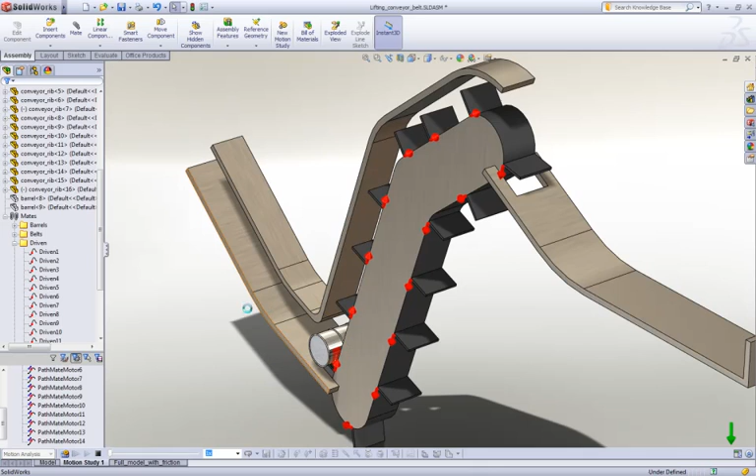Let's take a look at how this works. In this case, all we're doing is driving these ribs at a fixed speed representing the conveyor speed. But it would work with event-based simulation as well, so you can do event-based motion. All we have set up here is some contact between this barrel and the belts, as well as the outer frame. So it just takes a second to rebuild, and away we go.

The reason it works so quickly is because it's all kinematic aside from the contact. So there's not that much overhead to actually using pathmate motors. It will help you do things a lot more efficiently.

You can see in here we've actually got a little bit of friction, so you can see the barrels spin around as it rolls along the conveyor system.

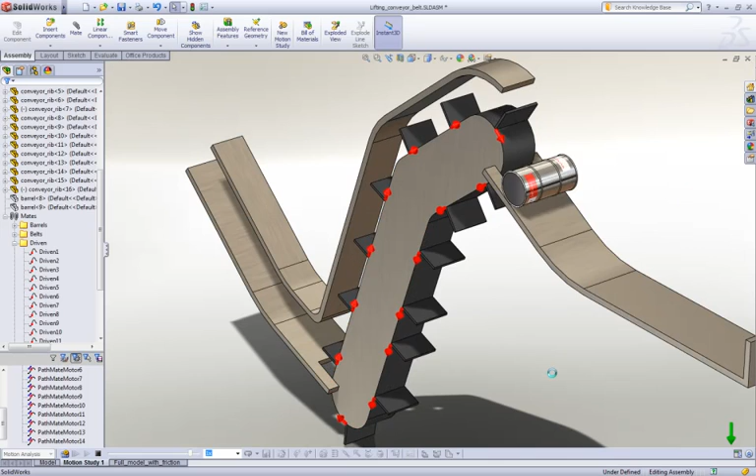And there we go. So we can just play that real time. You can see, very nice looking.

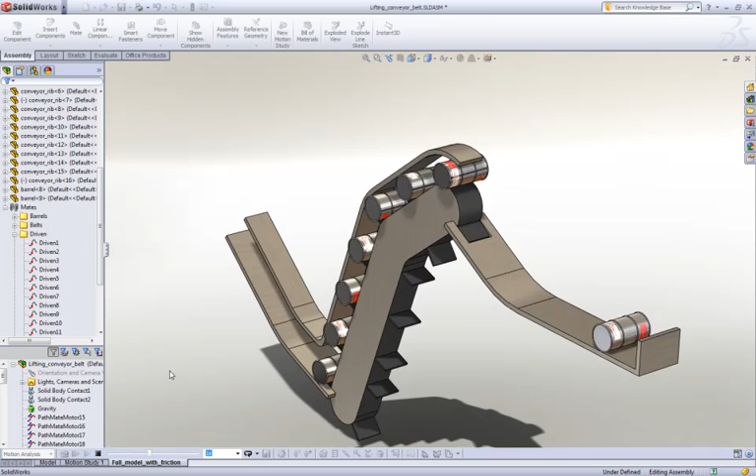And we can take that a step further by providing a whole series of barrels and see what that overall resulting motion looks like. So again, it's going to be great for machine designers or people who want to study the operation of conveyors, cranes, roller coasters, whatever. It's a great new enhancement to the motors in 2011.

Another area of improvement in 2011 is with how we define movement of our systems, whether it's through motions or forces. That's a new and improved motion function builder. In this case, we've got a packaging system. We're going to do a pick and place operation to put these shrink wrap towels into the cardboard boxes. What we're going to do is just focus on the timing of the move over. We want to shift the package over once it's raised from 0.5 to 1.5 seconds.

We've already got a function set up, but let's look at how we go about creating one of those. We have our built-in system of functions, such as constant speed, distance, oscillating, and so on. But we now have the ability to create our own custom functions, as you can see here. You can either save those or load them from file, and we can create new ones. So you can see we have our regular types, such as bringing in data point functions.

The function expression has been greatly improved, where we now have immediate access to all of the available functions in the list over here. So if you want to use any of them, just select the function and then fill in the blanks, and it will actually graph those for you as well. We also see access to the variables and constants.

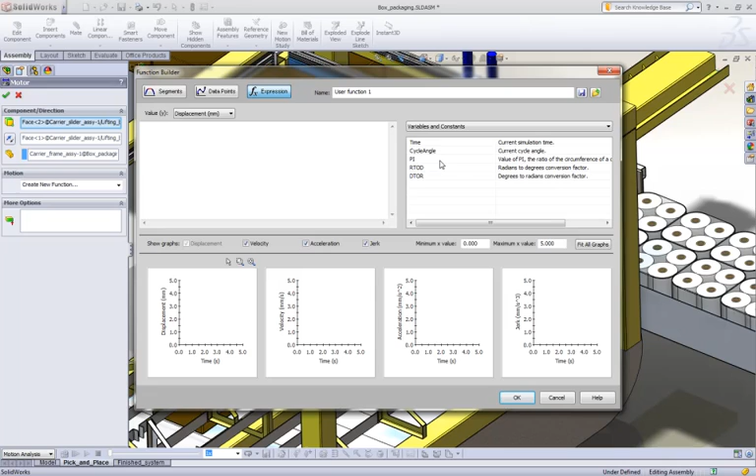Something new in 2011 is support for cycle angles. So if you're in the machine design business and you've got a cycle time for your machine, you can actually set it up and work out everything based on a cycle time, and just adjust the cycle time for everything to scale the timing and movement of the parts. Very powerful tool for machine builders.

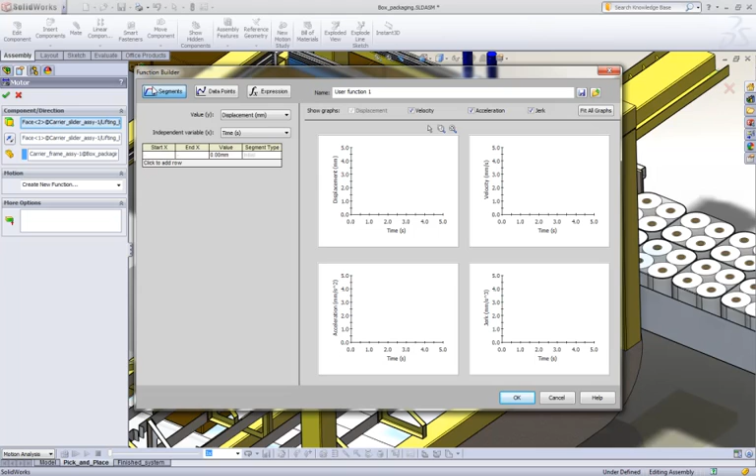But the most important one we want to talk about is segments. Really the changes that have come have been driven by customers, and with that the way they want to define functions, which is to build up ramps, dwells, and so on. So let's take a look at how we do our transition across.

We want to push it over from 0.5 to 1.5, hold it over at the other side from 1.5 to 2.5 seconds, and then bring it back from 2.5 to 3.5 seconds. So the first step to do that is from 0 to 0.5 seconds, keep it at 0. And again, we've got different interpolation options here, customer driven based on how many functions they typically use.

But from 0.5 to 1.5 seconds, we want to move it across. So we're going to move the motor 1090 millimeters. And again, we'll just set our interpolation. This is where you can see the value of seeing the velocity, acceleration, and jerk profiles.

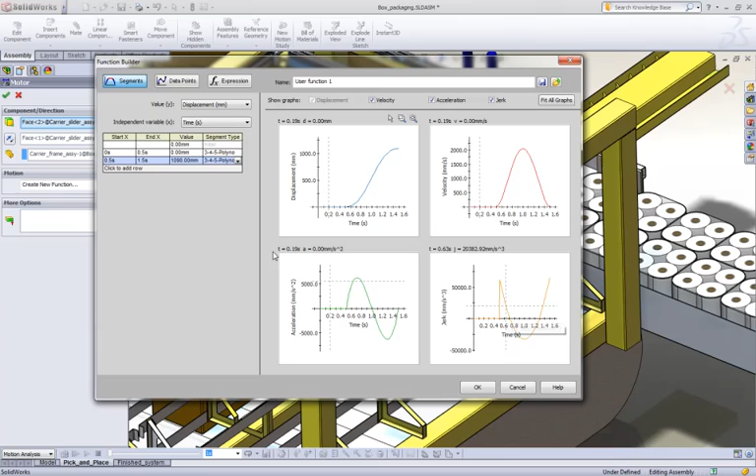And from 1.5 to 2.5, we're going to hold it there. So this is the dwell. And then finally, from 2.5 to 3.5, we're going to return back to 0. And then from 3.5 to 4 seconds, which is the end time, we're just going to hold it down there.

Again, we can set, as we said before, we see the velocity, acceleration, and jerk profiles for using that. We can type in the name here, and we can either save or load it from a file. You can control if you just want to see the displacement function. And you can see zoom to fit, you can zoom to the area of the graph, and so on.

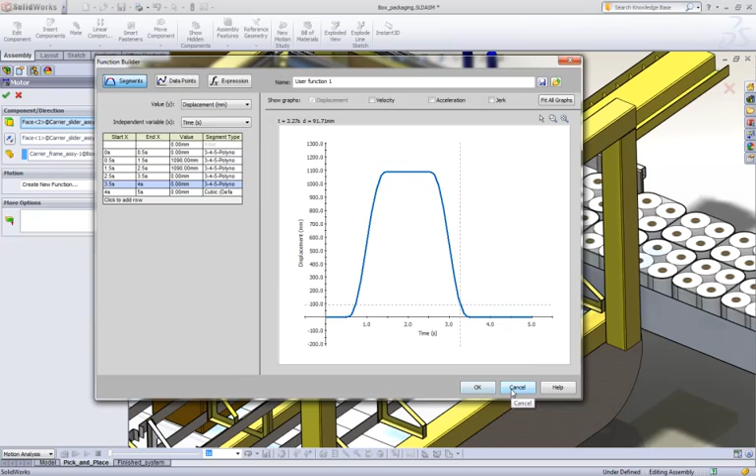Alright, so let's take a look at how that works. Just click on calculate. So it picks it up and then it moves it across. And I've added a few mate controls to turn some mates off so it'll actually drop it in the box.

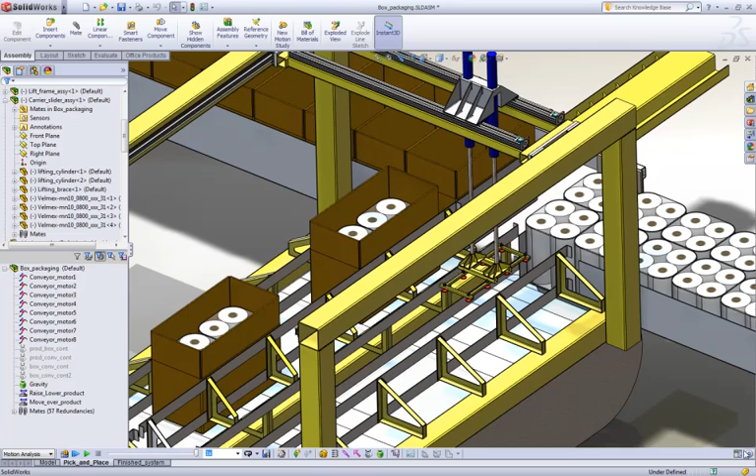This also will work well with event-based systems as well, because you can build up some very nice functions. We'll just fit the graph. You can see here's where we turn off the mates that hold the product.

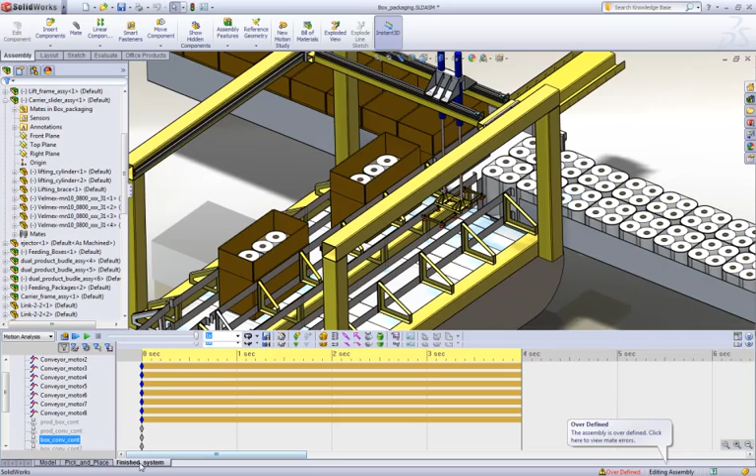Now if we combine this approach with the PathMate motor which we just saw, we can do the whole system. So we can index the conveyors, pick up the product, move it across, drop it, and so on, and repeat the cycle.

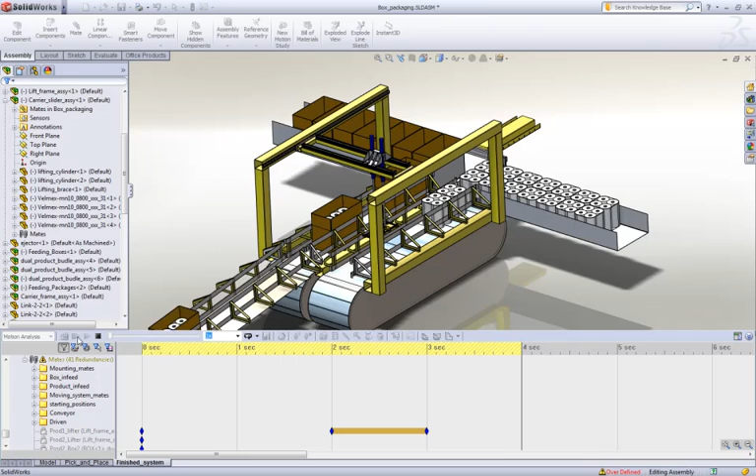So we really have improved the capabilities in 2011 for machine builders to get their jobs done, make it easier to do things, reuse information, and ensure the machines are going to work the first time.